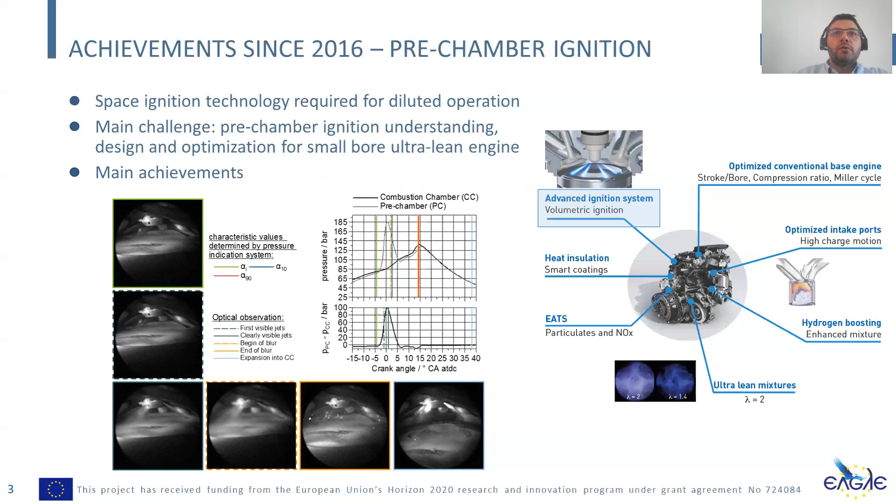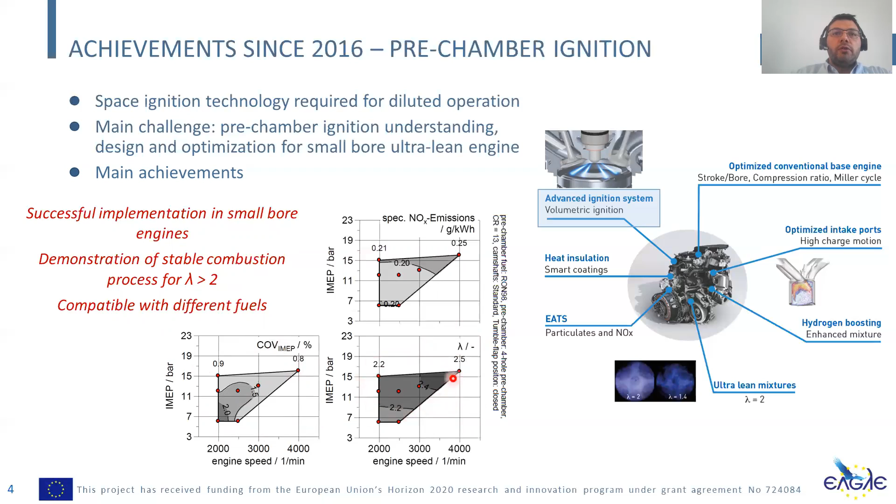In the end, we could successfully implement the pre-chamber ignition system in different small bore engines down to 76 millimeter bore. We could also demonstrate that a stable combustion process is possible in various conditions, and even with air-to-fuel dilution ratios quite above 2, which was the initial target. And we've also shown that the pre-chamber ignition system is compatible with different fuels. So you can use it obviously with liquid gasoline, but you can also use it with CNG or even with hydrogen.

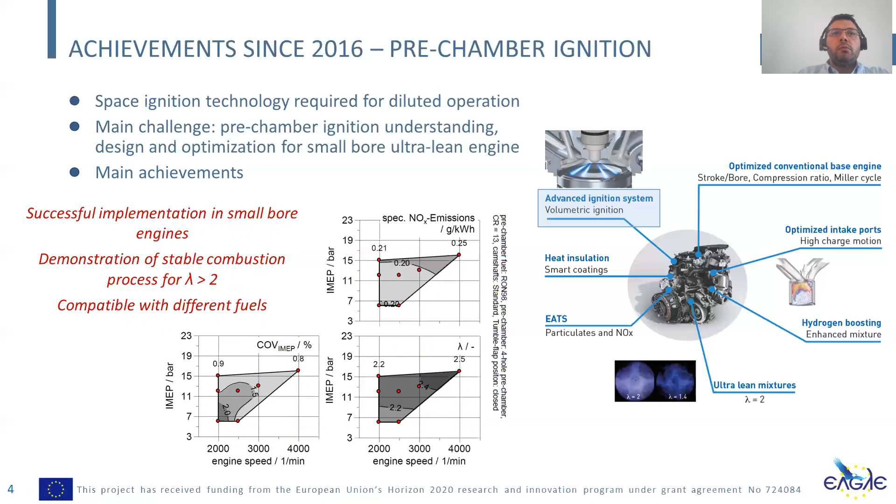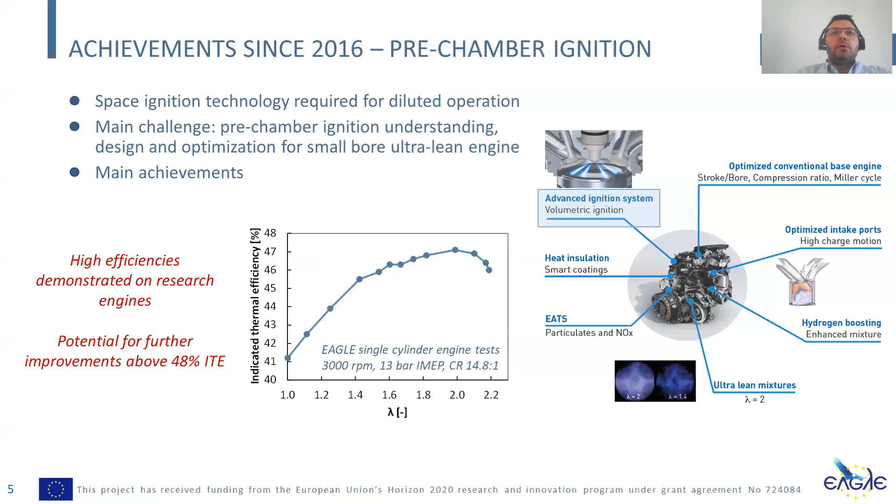In parallel to the pre-chamber, we've also investigated hydrogen boosting. So here the idea is not to use hydrogen as a single fuel, but as a supplemental fuel, which means together with a classical gasoline fuel. The idea is to benefit from the properties of hydrogen to extend the dilution limit. So as I think you all can see now, new initiatives are launched or announced daily around hydrogen, which I think opens also a few doors for new applications of hydrogen, also in ICE-based powertrains.

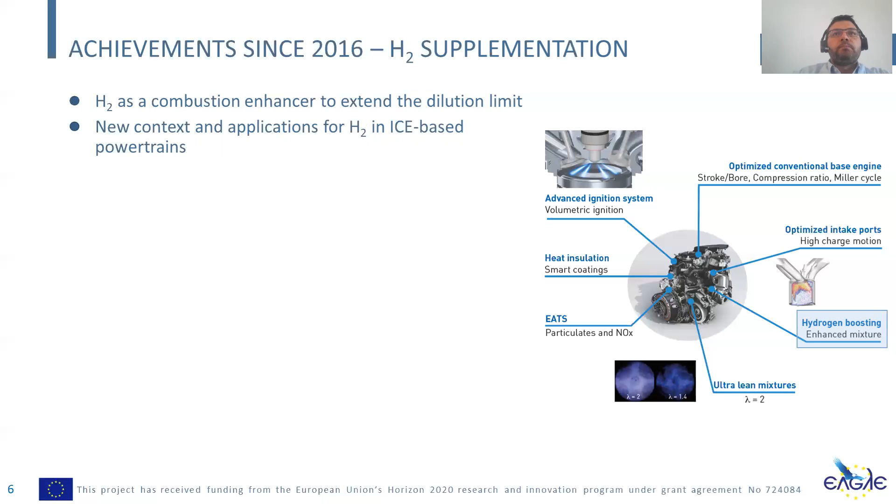In our case, in the EAGLE project, we could show that when combined with E10 fuel, even a small amount of hydrogen can significantly increase the dilution limit. You can reach also here, as you can see, an air-fuel ratio of 2 without any pre-chamber, lowering the NOx emissions and also increasing significantly the efficiency. I think when it comes to NOx emissions, that with a proper amount of hydrogen and optimized engine configuration and settings, it should be even possible to lower the NOx emissions below 10 ppm, so single-digit NOx concentration at the engine outlet, which would be a significant improvement in terms of pollutant emissions, at least for some operating conditions.

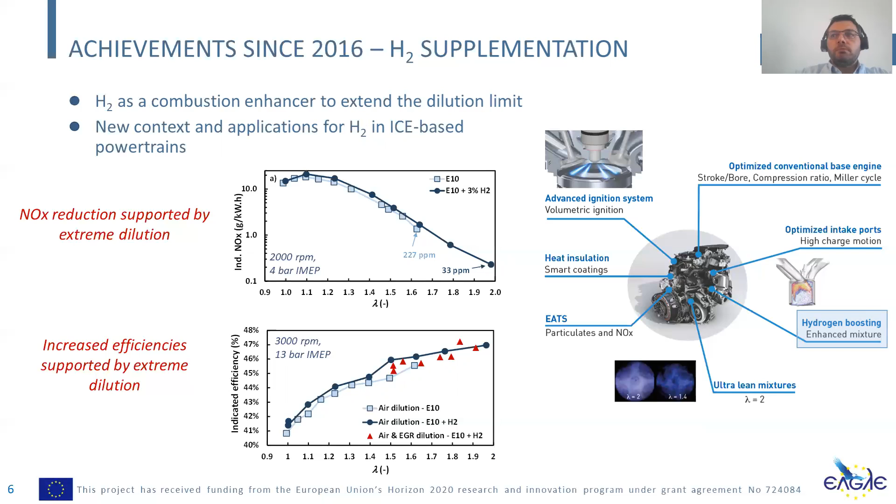So as I mentioned during the introduction, I cannot show you our final results since we are completing the project today. I will deliver the final deliverables later today after the presentation, and we will first discuss the final results with INEA during the final project review. And I think that some public information will be disclosed later in 2021.

However, I can give you some hints about what we did for the final multi-cylinder engine. First of all, we have implemented a dual-stage turbocharging system using a low-pressure turbocharger and an e-charger. So this is an electrified turbocharging system. We found out that given the requirements of the Eagle application, that would be the optimal solution, but of course, you can consider various turbocharging configurations.

Most likely, if your target is to achieve ultra-lean combustion over the complete engine map, then you will have to use a dual-stage turbocharging system. And when it comes to dual-stage turbocharging systems, one of the key points is to optimize the power split ratio between the high-pressure compression and the low-pressure compression stage, because whatever the architecture you are considering, you will have to find an optimal value for this power split ratio.

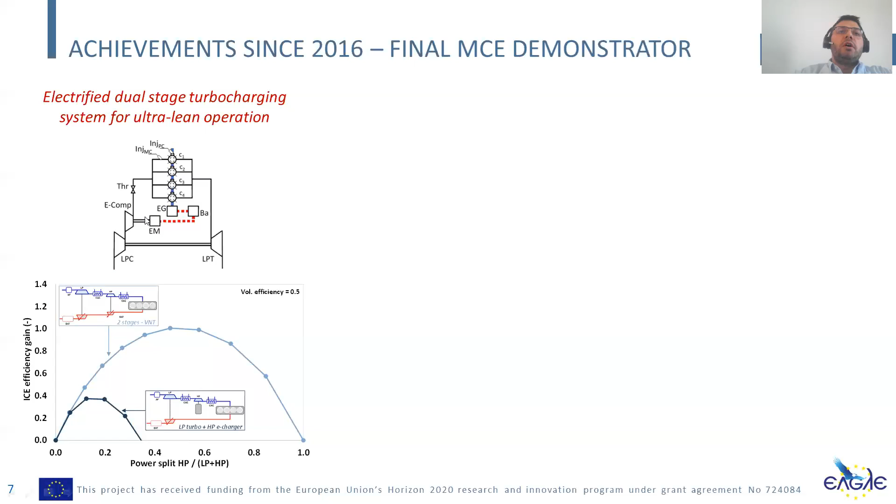For example, in our case, the e-charger obviously is run with electricity, and this electricity is not given for free. So you have to take into account this electricity production in the overall energy efficiency assessment of the engine and of the vehicle. In parallel to that, we've also developed a closed loop combustion control strategy.

So basically, we are using in-cylinder pressure sensors to monitor the combustion stability in all the cylinders of the engine. And then we can not only monitor the stability, but also act on the injection and ignition settings inside the pre-chamber to optimize the combustion stability for all the cylinders, and consequently to lower the pollutant emissions and to increase the brake thermal efficiency.

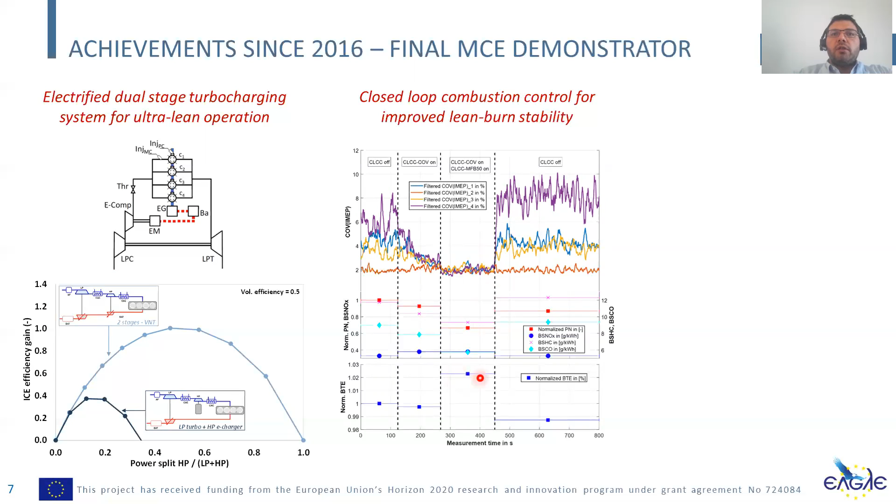For the final demonstration, at the engine test bench, we also evaluated a complete after-treatment system, including a DOC and a GPF, and also a newly developed LNT by our partners. Today, for this speech, I would like to highlight that not only the NOx regeneration efficiency has been taken into account, but also the selectivity of the LNT towards ammonia and towards N2O, keeping in mind the future potential regulations.

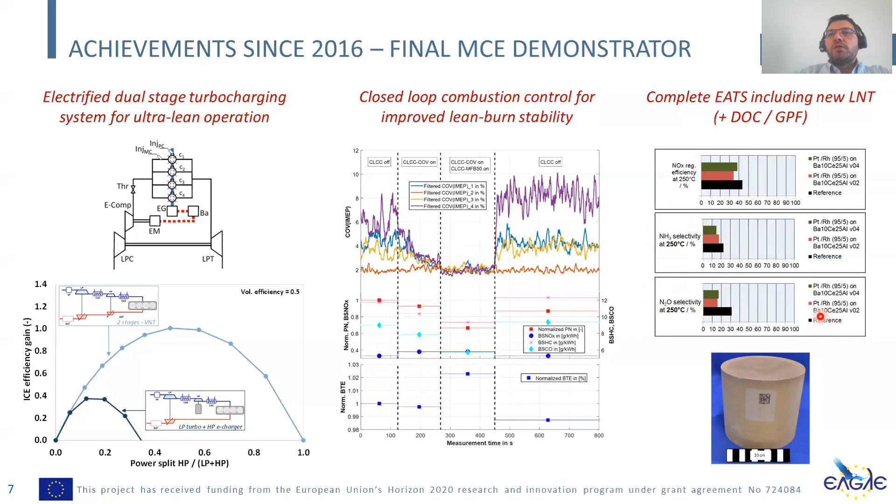And you can see here on this example that the material combinations that have been selected for the Eagle applications are better than the reference in terms of NH3 and N2O selectivity, better than the reference, which is a serial production LNT.

So the main impact in the end of the Eagle project is that we have demonstrated that ultra-lean SI engines could be a solution to reduce the impacts of future hybrid powertrains, in terms of local pollution, but also in terms of CO2 emissions. Focusing on the efficiency, if you look at the efficiencies that you can expect with an ultra-lean engine used in multi-mode hybrid powertrains, then you can achieve less than 50 grams of CO2 per kilometer for a PHEV application.

For your information, the hybrid powertrain that we are considering in the Eagle project is directly derived from the E-Tech configuration from Renault. The situation would be a little bit more difficult for HEV applications, for which we could achieve somewhere in between 85 and 90 grams of CO2 per kilometer. New models, methodologies, and technologies have been developed also during this project and are now available to further improve the engine efficiency. I cannot show you those results today, but we have measured PN emissions down to 10 nanometer with 2 different devices.

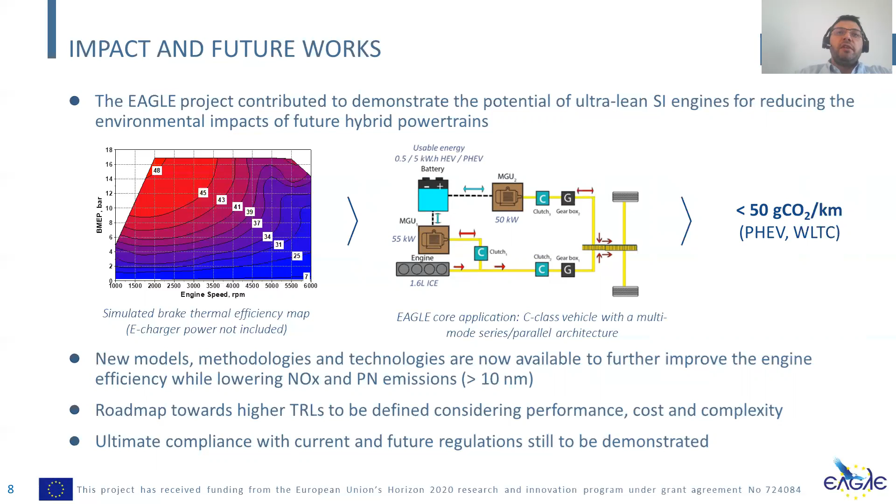And now if we look into the future and at the next steps, I would say that the first one would be to define more clearly the roadmap towards higher TRL for serial application, considering specifically the engine complexity. And we should also demonstrate the ultimate compliance of this engine concept with current and future regulations, namely with Euro 7 and RDE regulations. With that, I can conclude my talk today.